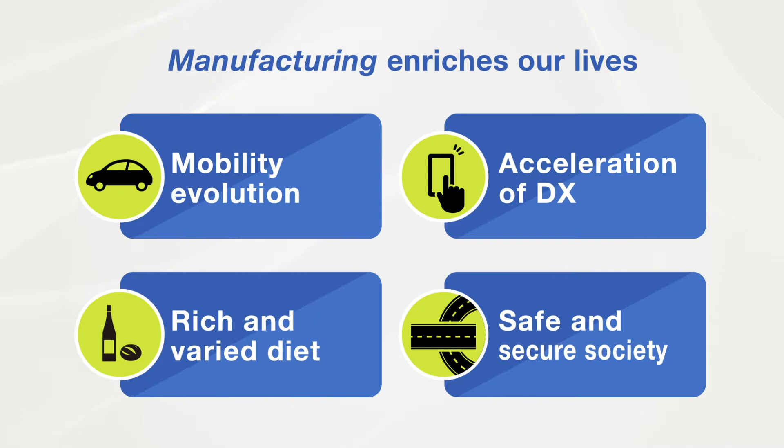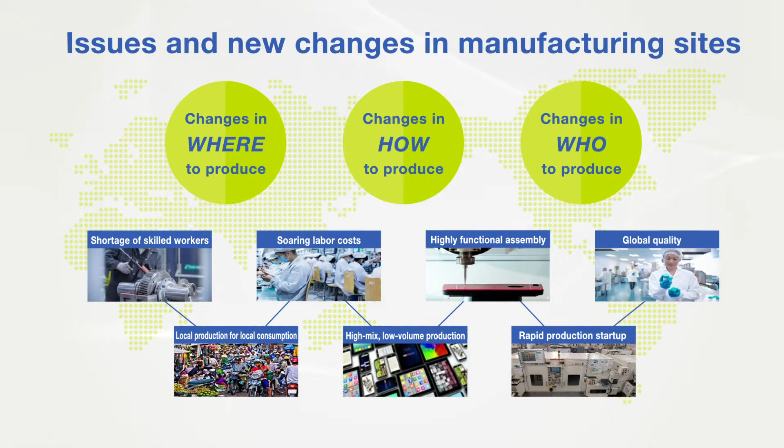Manufacturing, which enriches our lives, has been changing every day. Changes in where to produce, how to produce, and who to produce. To keep up with these changes, innovations in manufacturing sites must be achieved.

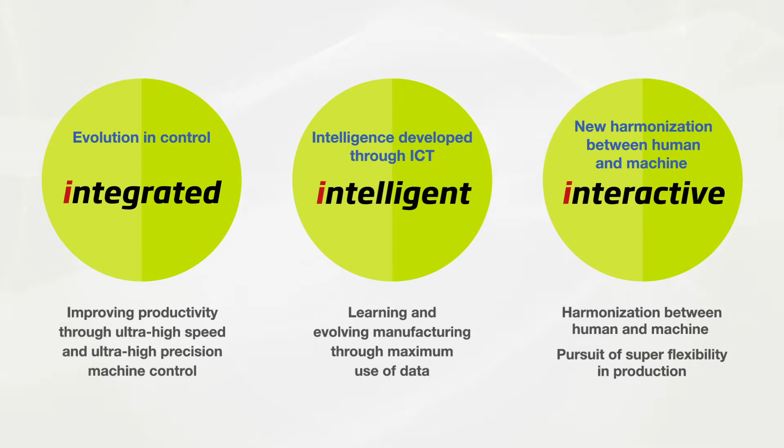Evolution in control, intelligence developed through ICT and AI, and new harmonization between human and machine through introduction of robots are needed to improve productivity. The key to handle these challenges is integration of control and information.

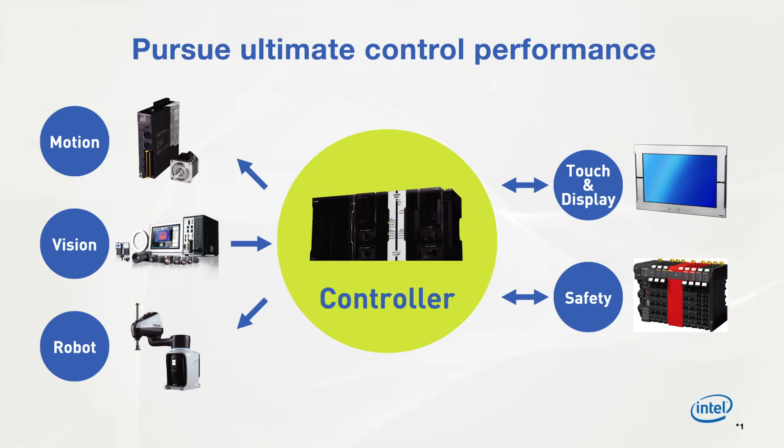Omron has adopted general-purpose processors for its industrial controllers in order to achieve the integration of control and information and to continue to evolve them. We have also maximized the performance of our controllers by using multi-core architecture.

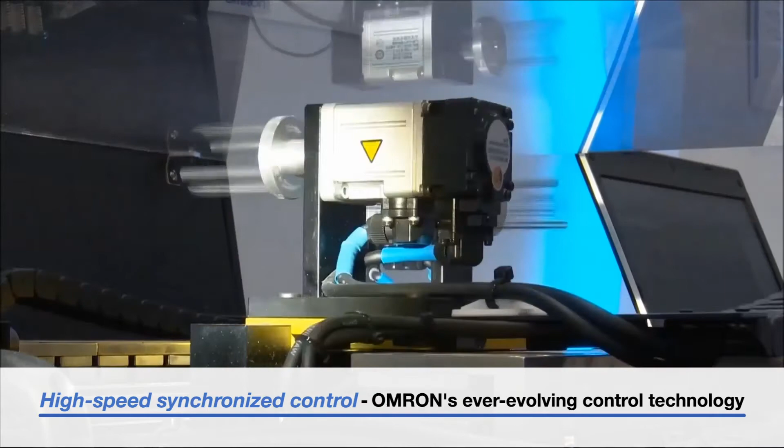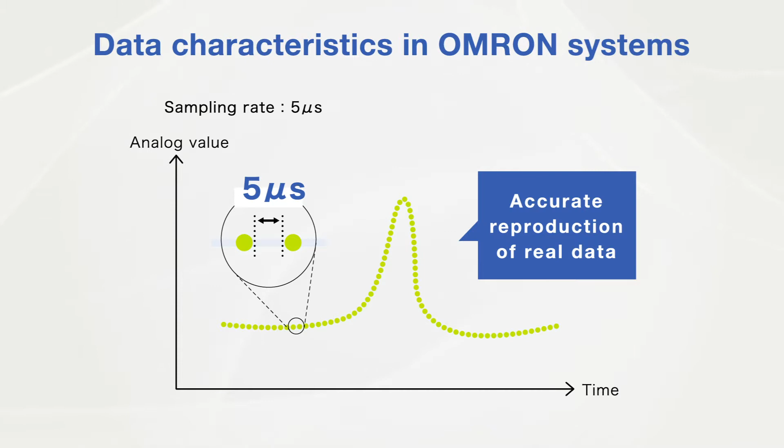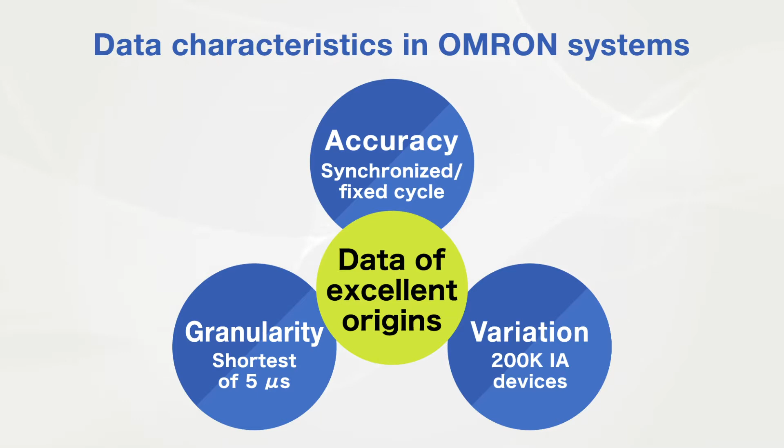Now, we can realize complex machine controls requiring ultra-high speed and high precision, which we could hardly have had before. Also, we have achieved microsecond level of accuracy. We can generate a rich variety of data of excellent origins in quite a short interval.

The NX7 machine automation controller can synchronously control up to 256 servo motors and continuously write hundreds of thousands of bytes of data per second to an SQL server.

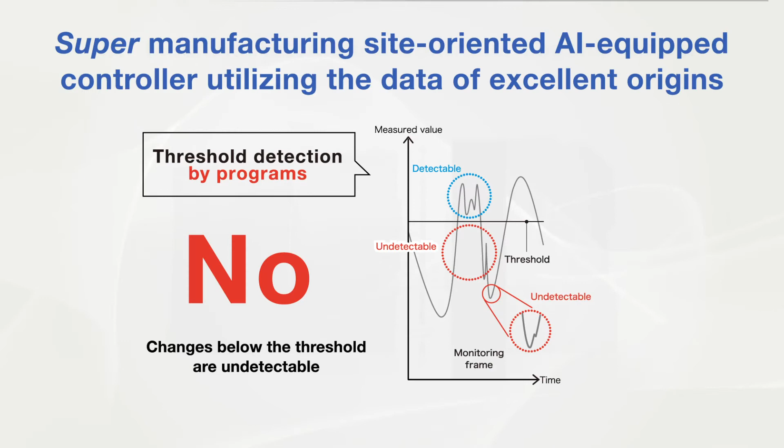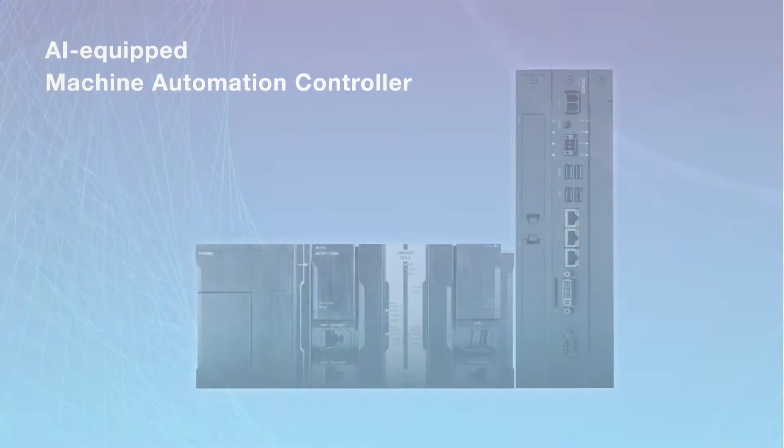NX7 detects strange behaviors in equipment in real time, combining AI technology and control at ultra-high speed. The world's first machine automation controller with AI technology.

NY Series Industrial PC is equipped with high-speed control and reliability of PLC and the versatility and flexibility of Windows.

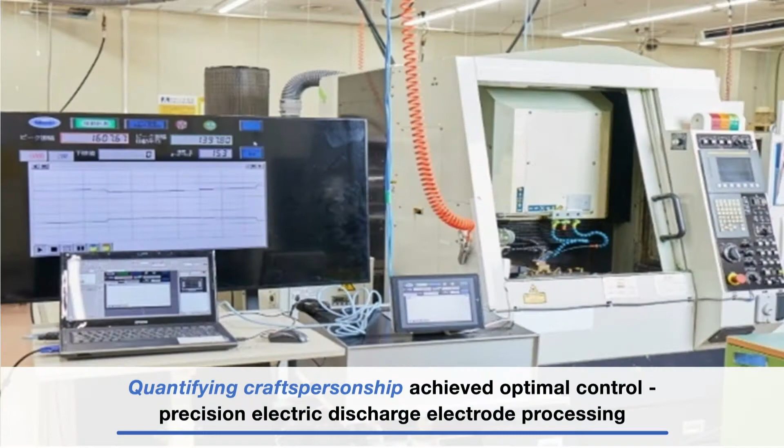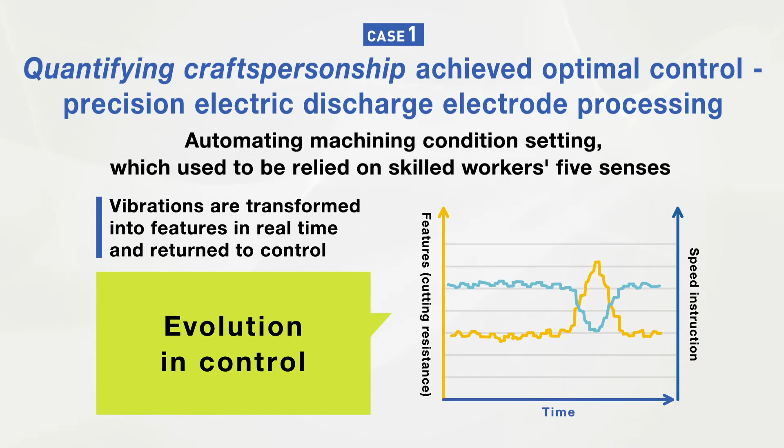For high-precision processing with a mold processing machine, machining condition setting can be automated by quantifying craftspersonship. An automatic control system with optimal processing conditions that exceed the judgment of a skilled worker has been constructed. This system has shortened machining time by 40% and reduced tool wear by 20%.

For a final inspection of automotive parts containing small motors, the system can collect and analyze several tens of kilohertz high-speed analog signals, which are required for judgment, and can store all results in a traceability database.

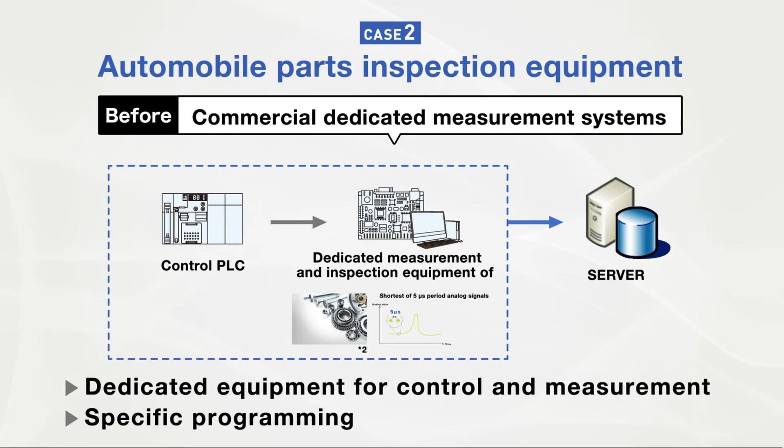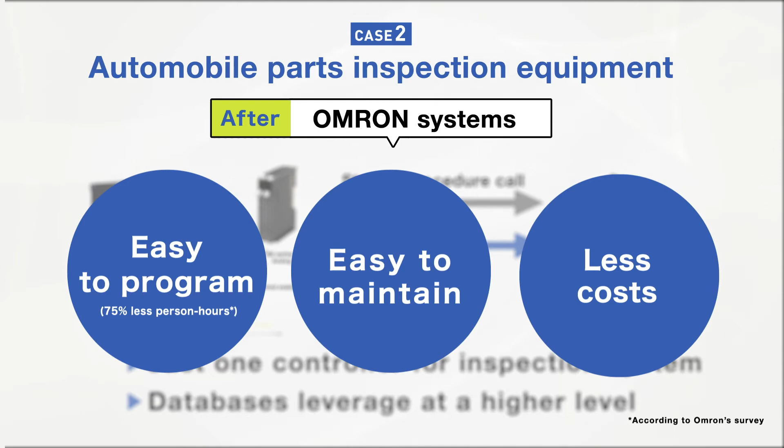Just one controller completes the inspection instead of conventional special programs created with a signal processing dedicated computer. Development time and costs can be significantly reduced.

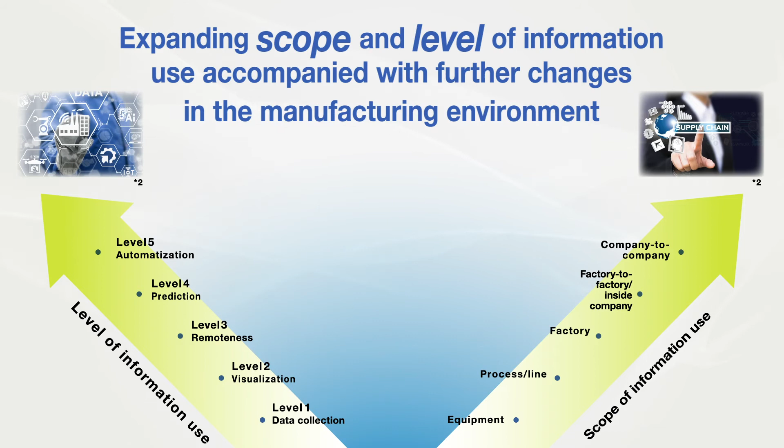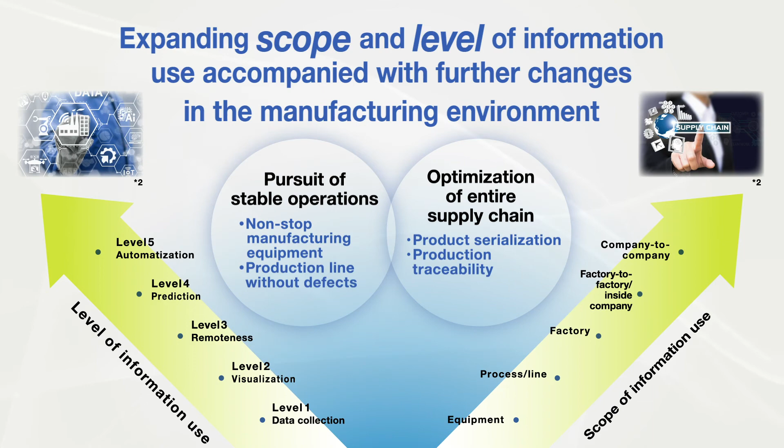The manufacturing environment will further evolve with automation of information utilization level and expansion of information utilization scope. Non-stop equipment, defect-free lines, and optimization of entire supply chain will come true. This is an example of a future manufacturing site with a high affinity between operation technology and information technology.

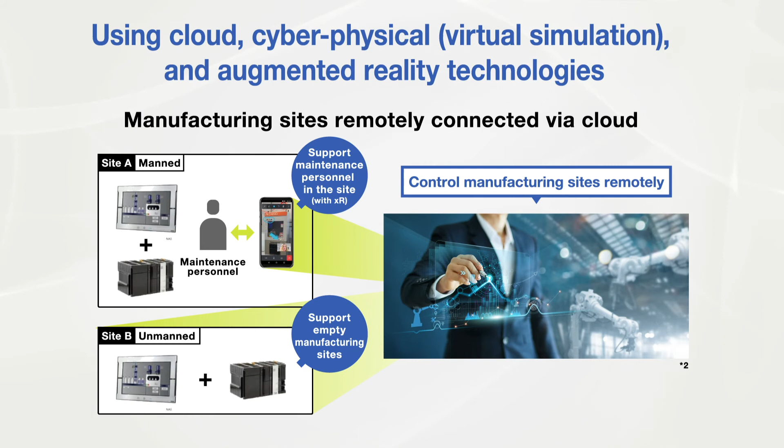Affinity with the cloud technology will increase more. Human and machine work together in remote places to support manufacturing sites. Now, Omron can show the demonstration of the concept for this future vision through an augmented reality world.

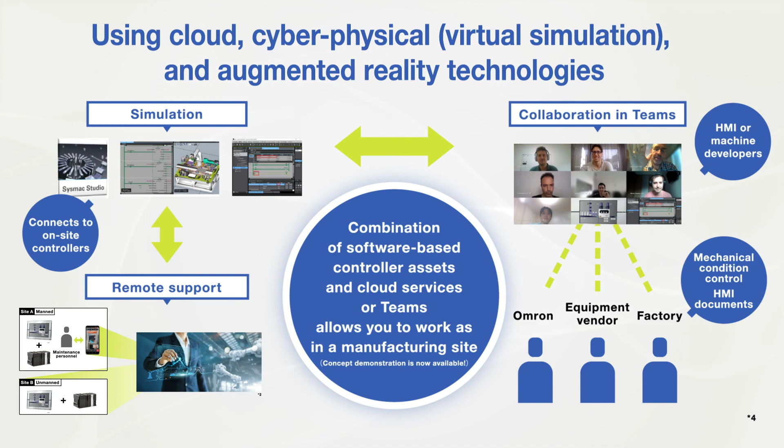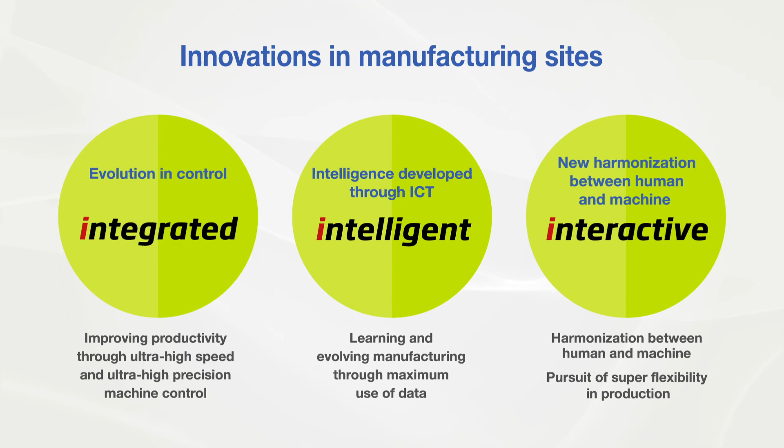In the future, Omron will increase an affinity between manufacturing sites and IT to bring innovations to manufacturing sites with the 3 I's. Omron will continue to contribute to innovations in manufacturing by evolving the integration of control and information.